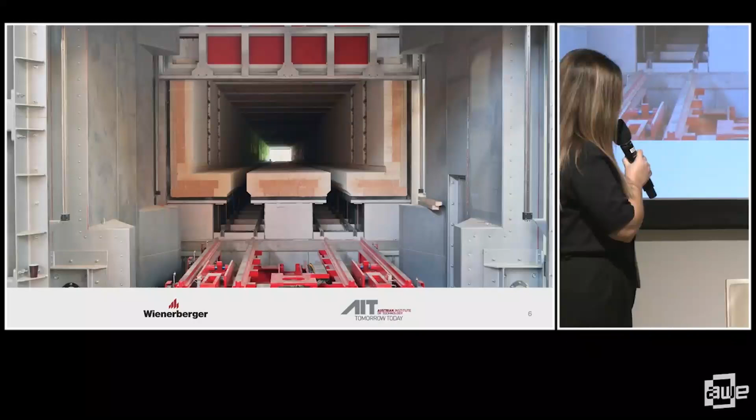Why is that so special, why is that something to be highlighted? If you go to the next slide, what we're seeing is a brick tunnel kiln, which is basically something used to bake your bricks, if I can say that in a simple matter. In the case of Green Bricks at Wienerberger, as you can see in the logo down below, this kiln is 100% powered by renewable energy, which is usually not the case.

This is something really special that Green Bricks brings to this project, but it's not the only one. Something else I want to highlight that is special energy-wise is that they are also introducing fully carbon neutral clay mixtures, which is the raw material you need before you can produce any bricks. So this entire production process is focused on renewable energy and reducing carbon emissions. They also did that by introducing a very special layout of a heat generation network so they can reuse the heat and reduce the primary energy consumption needed.

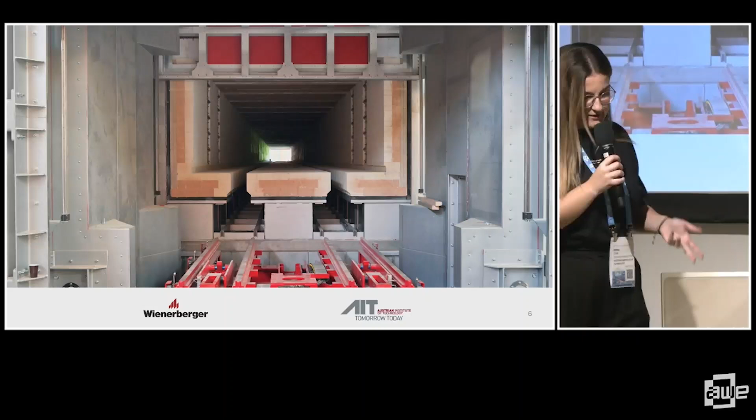Two main results I want to highlight from Green Bricks: the first is a reduction in carbon emissions by 90%, and when it comes to primary energy demand, a reduction by 40%. These are results that really need to be celebrated, because we're talking about Wienerberger, which is one of the largest brick production companies, not only in Austria but I think also in the region. They are quite high up placed. So as you can see, this project is really contributing in terms of transforming industry.

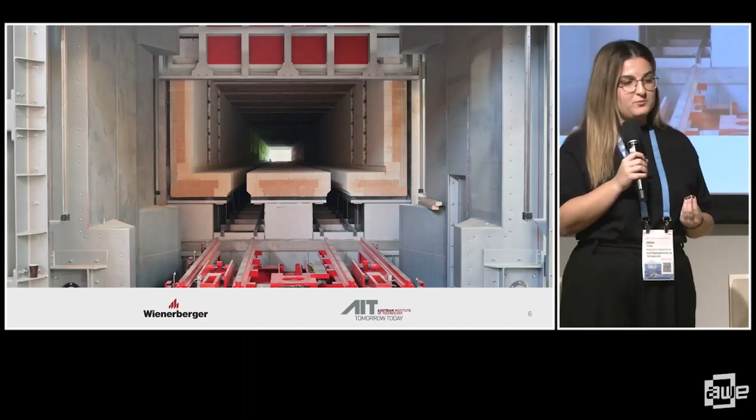And now we wanted to take all of this great effort and translate it into an XR concept that can be more easily digested by different audiences. Basti will tell you more about it.

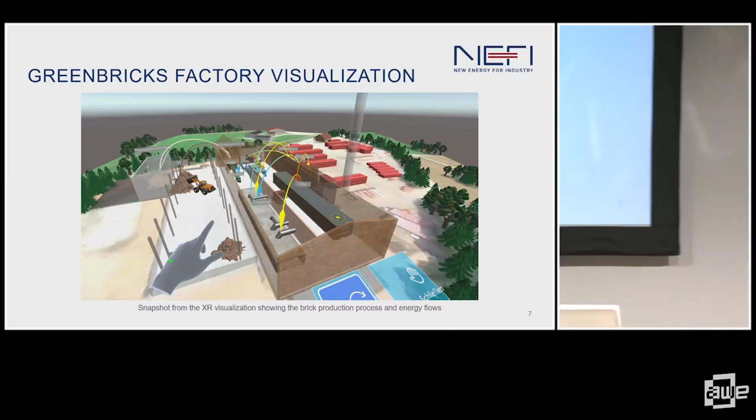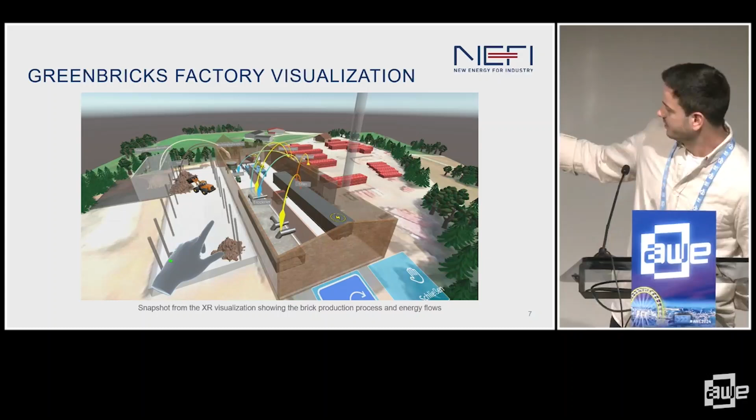Yes, so that's a snapshot from the XR application. It's basically a visualization of the new brick plant that was newly constructed in Uttendorf in Upper Austria. It highlights the key components needed in the whole brick production process, and it also features, as you see here with the colorful arrows, the energy flows resulting from the new heat network developed in the project, which had the result of a 40% energy reduction.

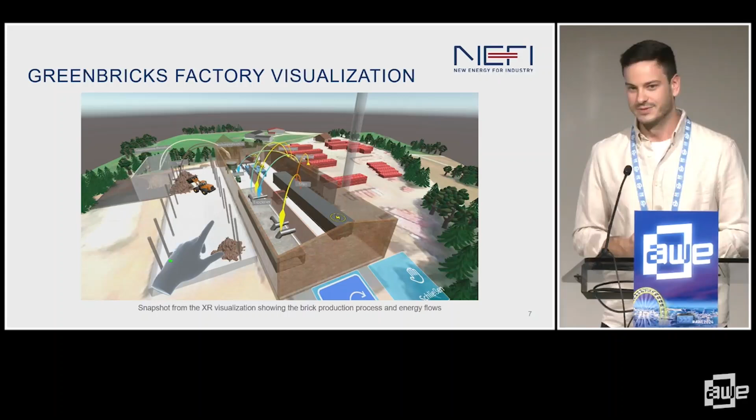The goal was to make this whole concept more comprehensible, more accessible. We also have another use of XR in this project, which is a game that features the new Wienerberger products, like the new bricks and a new adhesive for these bricks. The goal of this game was to highlight the overall simplified workflow using these products, so you had to complete a brick house wall with an XR application to see that it's actually pretty easy to build such a wall using this product. So it was basically a product demo in XR.

That brings us to the next project, which is Green Steel. This focuses on the steel industry and aims at decarbonizing the steel production process. Since this sector is heavily dependent on fossil energy, it's even more important to tackle this and replace these fossil fuels and energies with CO2 neutral ones. The challenge here was to adapt the industrial furnaces used to melt the steel to use CO2 neutral energies while maintaining high product quality.

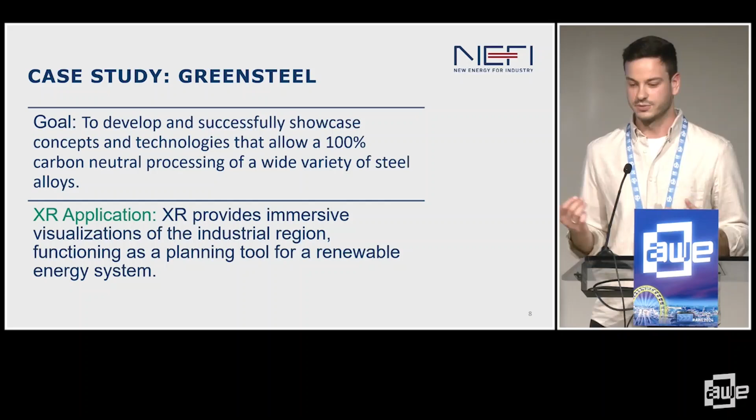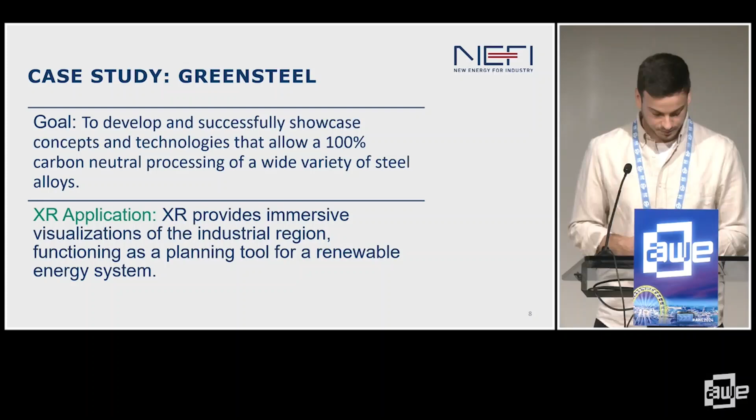In order to actually have this energy, a big part of this project was to identify CO2 neutral energy sources and find a concept to bring them to the factories and distribute them in the area. This is one of the voestalpine plants functioning as a demonstration site, and all these concepts researched here are applied here, but should also be applied in the future to other sectors and other industrial sites.

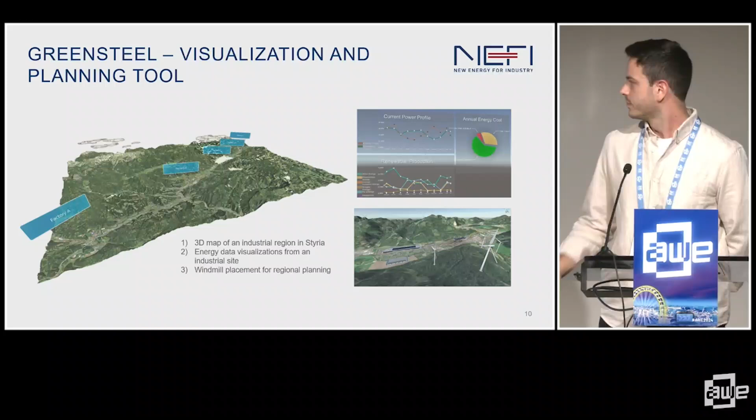Now we're going to talk about the XR application when it comes to green steel. As we already mentioned, steel is one of the industries that is heavily relying on gas, and one of the industries that can profit the most from renewable energy sources.

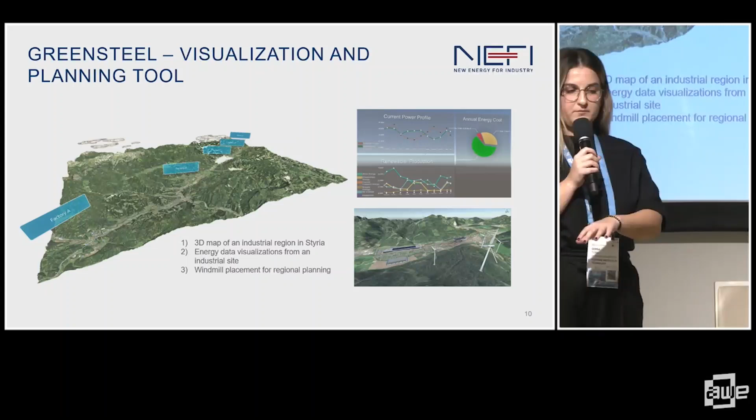But as Basti already mentioned, you need to find these renewable energy sources before you can actually make some change. So what we try to do with the XR application is have it serve as a planning tool for an entire region. In the very first photo, you are seeing a 3D map visualization of a region in Styria, in which most of the factories of voestalpine are located. This region is very much focused on industry.

On the photo down below, we are seeing a simulation of alternative energy sources, which are photovoltaic, windmills, but also hydrogen. We shouldn't forget to mention hydrogen. With all of these simulations, we will then have a calculation for the energy supply demand when it comes to the entire region.

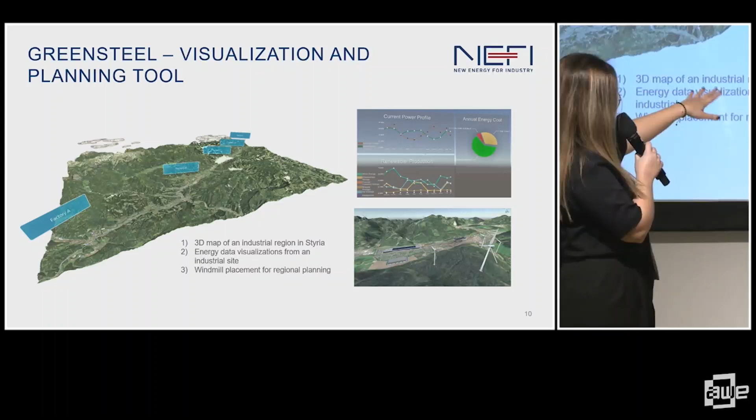The whole application is also coupled with Dymola, which is software that our researchers and scientists in AIT often use to have all of these calculations at hand. So anybody going through the XR application can see how, in this region, you can calculate the certain energy demand for steel production, and also see how these renewable energy sources can then fit within this energy demand.

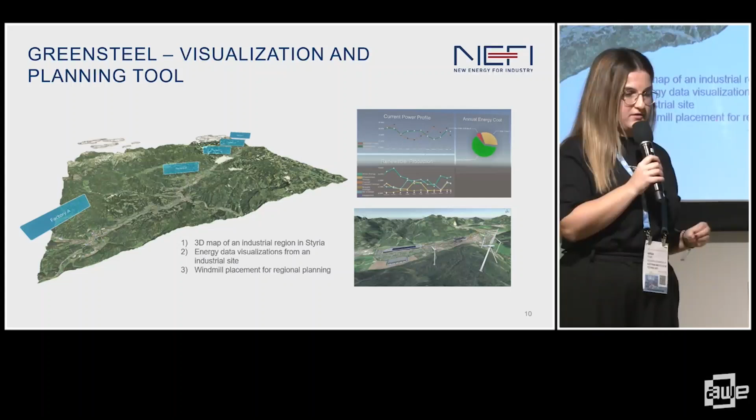Next, we're going to show you another project of ours, which is Enviotcast. It's good that it's following green steel, because we're still on the foundry concept, so to say.

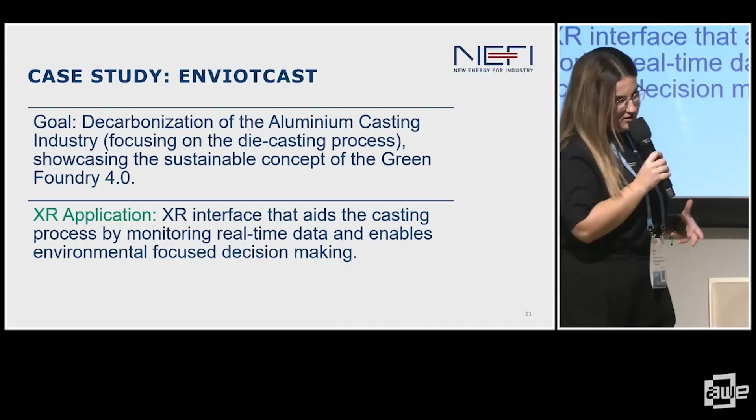So we go from steel now to aluminium, and as you can see in the slide, the main goal of this particular project is the decarbonization of the aluminium casting industry, particularly focusing on the die casting process. What's important to highlight is that in this project, we're also showcasing a sustainable concept of Green Foundry 4.0, which Basti will also show in the XR application a bit later.

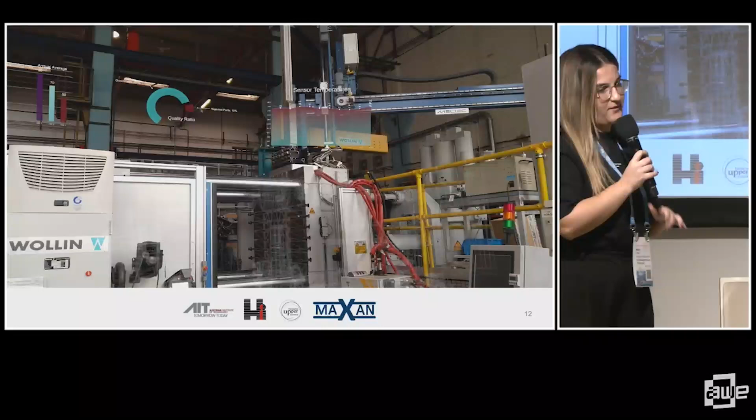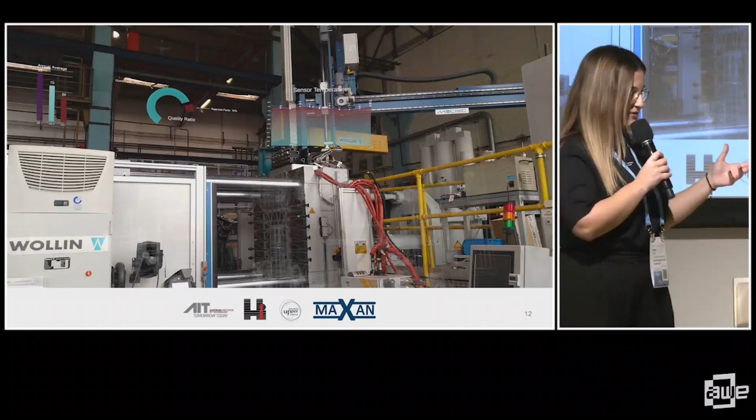So basically this is taken from LKR, in Ranshofen. All of the projects that we're showcasing today have been implemented at different regions throughout Austria. Enviotcast is implemented in Ranshofen, and here you're seeing a part of the process, the metal die casting process and the machine.

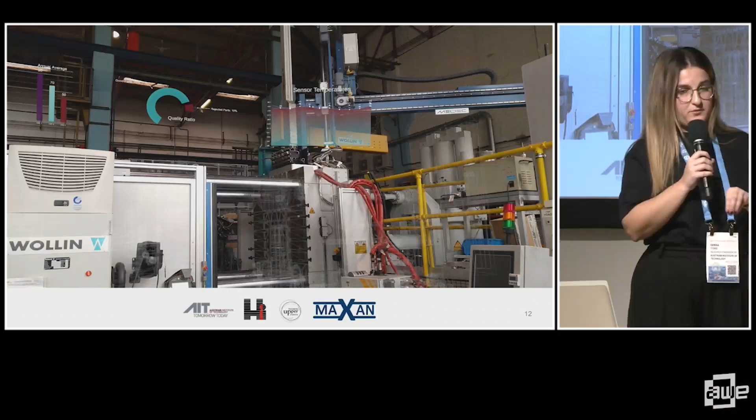The idea and main goal here was to reduce CO2 emissions in this sector by 30%, and then create a pathway to fully decarbonize the aluminium industry in the future, which is not as easy as it sounds. To tell you more about the Green Foundry 4.0 concept, we will now showcase the XR application.

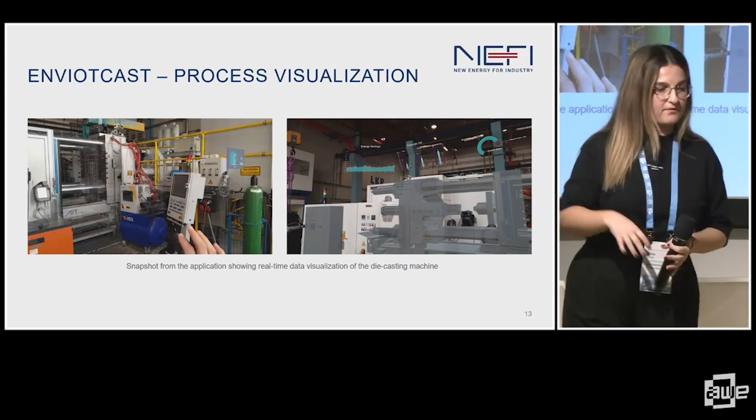So Basti, if you can go through. Yes, so the XR application in this project was actually functioning as a heads-up display for this specific die casting machine. Now we've heard the word die casting machine a lot of times - don't be scared, nobody dies in these machines.

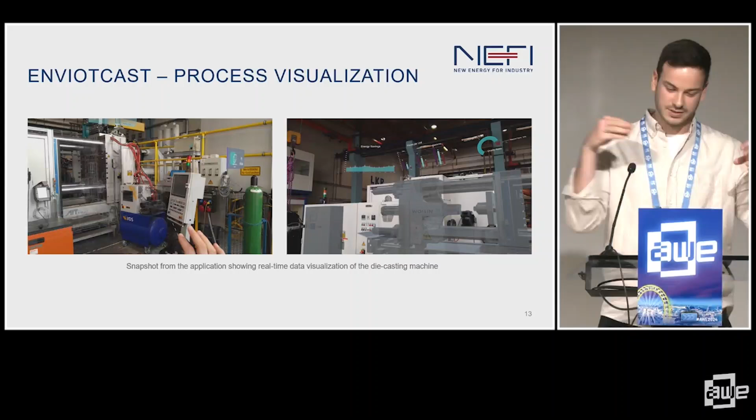They are just used to create aluminium forms somehow - aluminium is melted and then with high pressure put into a shape, and then it's cooled down, and you have a shape often used in the automotive industry, for example. So for this machine in this project, we developed an XR application that...

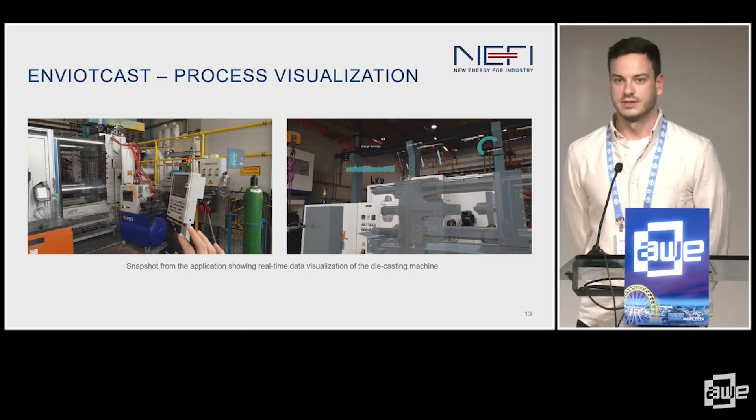...visualizes real-time data of this machine and is connected to the machine. So you always have an overview of, for example, sensor data, temperatures, error messages, but also energy consumption of the process, which allows you to monitor the whole casting process, and also helps the decision making in this process with a focus on energy savings and environmental aspects.

And the last project that we brought today is Compass, which is not coming from the NEFI network, but from Horizon Europe, and it includes 13 partners from all over Europe that are coming from research institutions and industry. They are representing Austria, the Netherlands, Italy, and Germany and Spain.

And this project is tackling the waste that is produced in the aerospace and automotive industry, which is a lot. An important part of this project is the development of digital tools, like, for example, the so-called digital product passport, which functions as a tracking system, so to say, for parts and materials.

For example, if you take a plane, every single part of this plane should have such a digital product passport, so it's traceable and you always have the history of the part. Which brings us to the focus of this project: make it suitable and better recyclable, and make it better suited for remanufacturing.

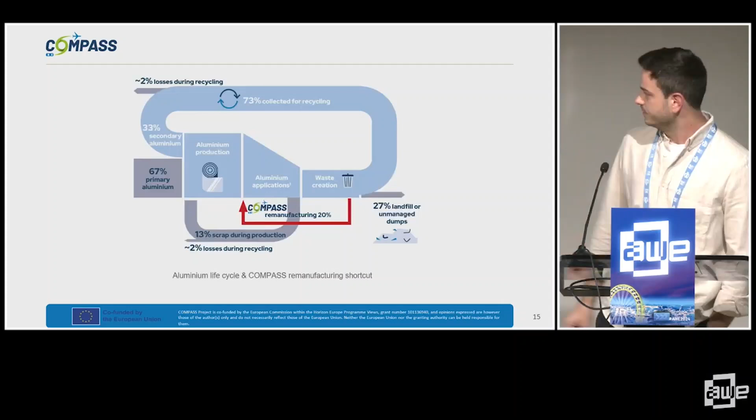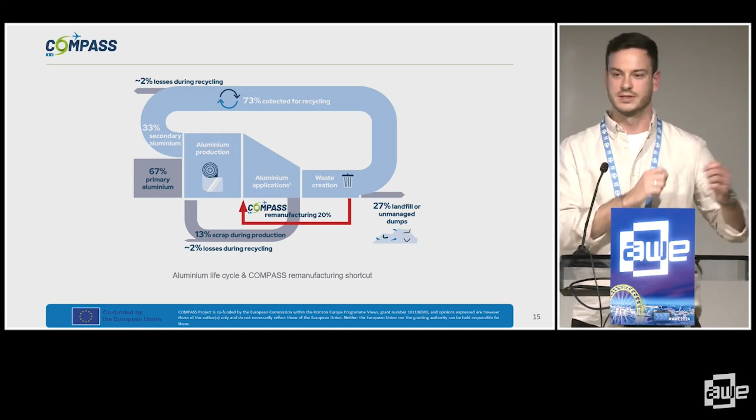The project focuses on materials such as sheet metals and thermoplastic composites. If we look at aluminium, for example, which is often used in plane parts and sheet metals, the goal of Compass is to remanufacture 20% of the waste that would usually be shredded and dumped. It should be a shortcut from waste creation to a new application and a new life for this part. In this project, it's limited to reforming, so you don't have to melt the parts, but reform them into another shape for another purpose, which also saves energy and emissions.

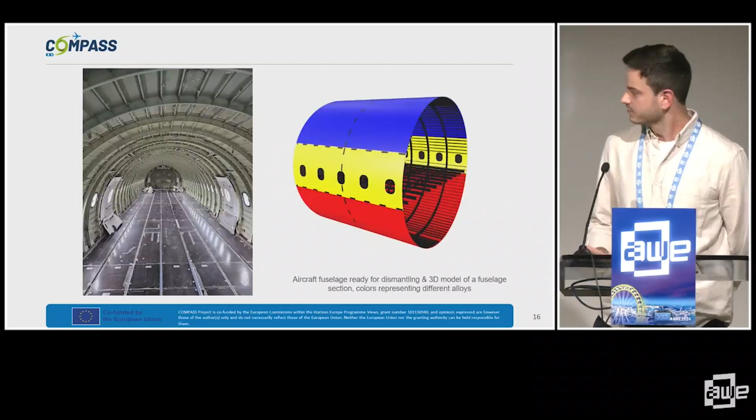Okay, so now we're going to the XR part of the project, basically how Compass translates their goals to XR.

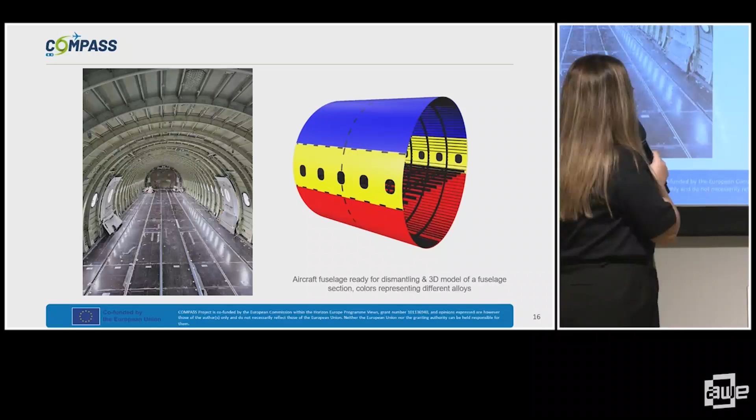The very first picture you're seeing is an aircraft fuselage, ready for dismantling. I was a bit shocked when I first saw it, because you're not used to seeing them like that. But this is how an aircraft looks right before it's ready to dismantle.

With the goal of Compass, we are trying to build an AR overlay, a virtual overlay that would help the dismantling process, especially the cutting part. On the right side of the presentation is a 3D model of this particular fuselage, where different colors represent different alloys that need to be separated before they can be repurposed and reused. The XR application would aid this process, helping to differentiate between the alloys, and also connect them to the digital passport my colleague mentioned before.

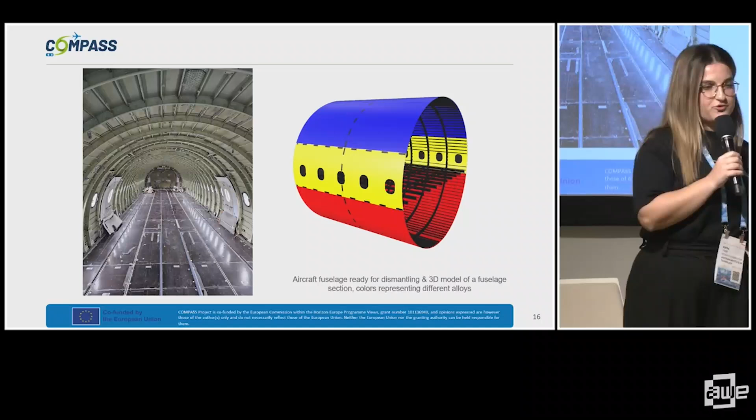Something to highlight is that Compass is one of our youngest projects. It started only in January this year, meaning we are still working on a broader concept for the XR application, and we're currently working on it. There's also the idea to perhaps involve training as an important part of the XR applications in Compass, because it would be quite helpful to train whoever is doing the dismantling process beforehand.

Okay, we can go to the conclusive slide. I hope that with our presentation you have an idea of how XR is contributing to environmental tech. We all know the power of XR, but perhaps this is one of the most unusual use cases you might have seen on stage today.

But my favorite part, if I would choose from all of these contributions, is the fact that XR really helps bring your concepts nearer to any audience. It's a great help for us to be able to translate the very hard work that our researchers and scientists do to everyone who is willing to hear how our work can transform industry towards climate neutrality.